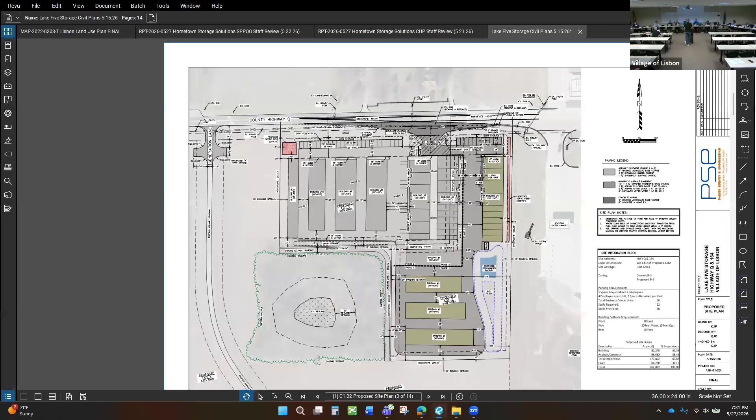Okay, how tall are those plantings? It varies. What's the tallest thing that you've got out there? Probably some of the arborvitaes. Which would be how tall? I believe it's stated in the packet, I don't have the dimensions in front of me.

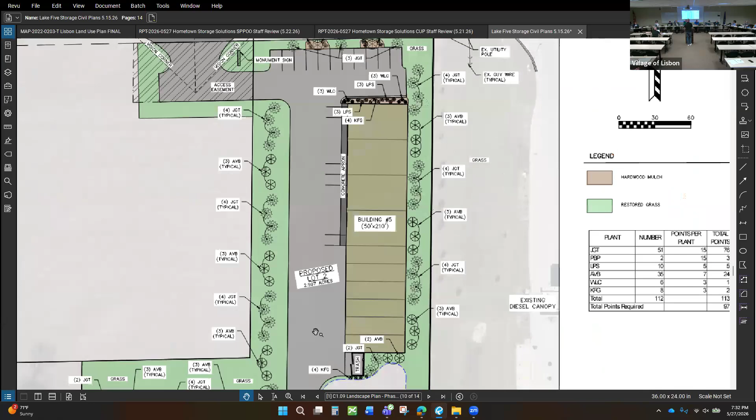That's along the east side? It's throughout the property. No, I'm talking about the screening for the development, primarily the east side, which is the common property line with Quick Trip. I'm concerned about the screening there. There's obviously no berm there, and you've got some landscaping. I know you submitted a landscaping plan.

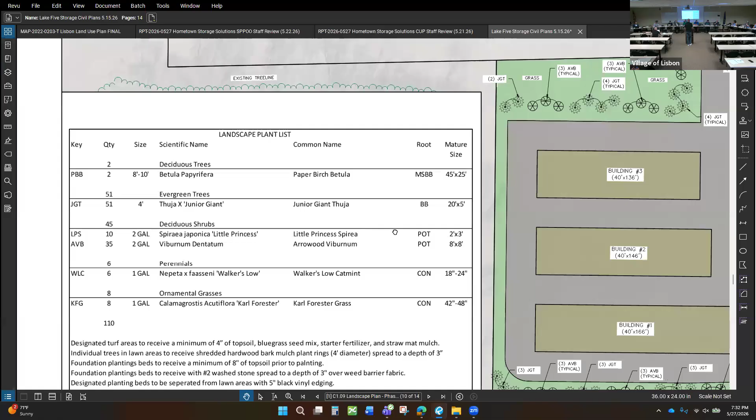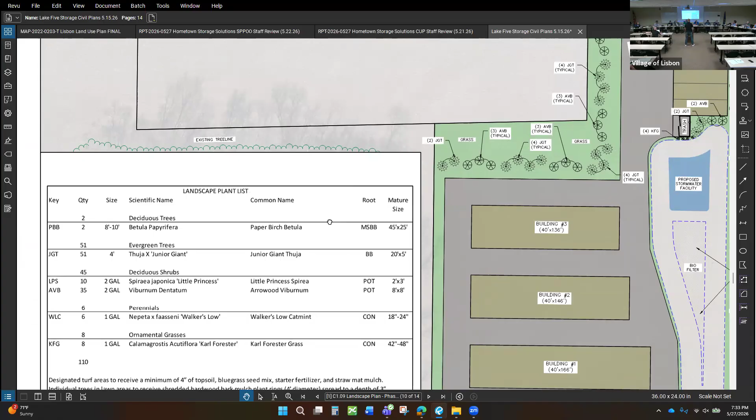I'm also concerned along the same thought. All those buildings, that whole building is identical to the three buildings that are 90 degrees to the south of there. I would like to see those buildings not be identical next to each other, whether it's by color or something, so it doesn't look like the same thing, four buildings in a row.

So we have some type of aesthetics there, because that's what the public is going to see. They're not gonna see the west side or north side of these buildings. I'd like to see something changed architecturally on the ends of those buildings. It wouldn't take a whole lot, but just so they don't look identical. Will there be enough room to do landscaping between the septic bed and the buildings? Well, we're gonna get into the septic later, but that's a concern. We've only got 20 feet between the building itself and the property line on the east side.

So if you figure a landscaping bed of 4 to 6 feet, plus another 6 feet to the septic field, that is theoretical at this point. There is no septic plan for that. Then you've got 6 feet on the other side, and 5 feet that has to be off the property line. The math doesn't work. So, to start, on building 5 there, I believe there's 10 feet between the back of the building and the septic field, theoretical space dedicated to whatever the septic installer needs.

The septic installer needs, I believe, 660 square feet, in which the 6 foot width shown is the absolute max allowed for a distribution cell. The standard width they install is 2 to 3 feet. So when we put together this plan, it was to provide the maximum width they would need for a distribution cell. They like a long, narrow run for the septic install, so we provided as much length as they could possibly want.

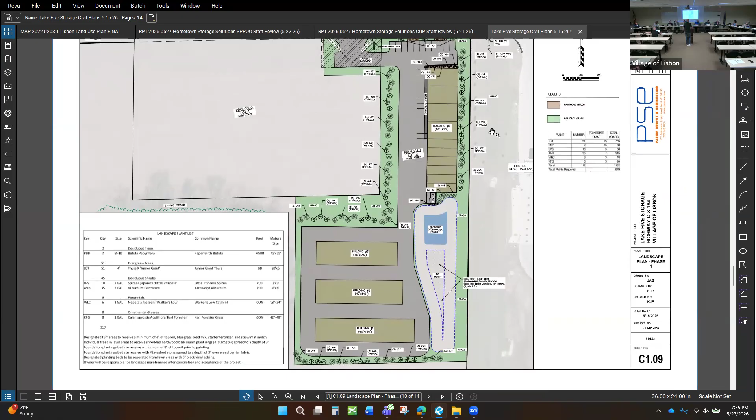Out of the length we have provided, they only need right now 40% of the proposed space, so we can definitely narrow the actual install to well within that 6 feet, and extend that distribution cell further. Well, we'll get into the septic questions I've got later, but let me go through the rest of this, because right now I'd like something to occur on the ends of those buildings.

And the side of the first building, the long building, I forget which number that is. Number 5, and the other 3 buildings that are perpendicular, so they don't look identical. Otherwise, I don't think it's gonna look very attractive at all from the east. Would it be possible to pull up the 3D rendering? We're talking about 4 buildings, one that runs north-south, and then 3 that run east-west.

I'm gonna come back, Warren. What are you thinking? Yeah, why don't you come back?

I'm just looking through the minutes from the last meeting. The next question I have is regarding item E. Can you explain, with no fencing and no gate, how the security on this works? I know you mentioned some type of system that's gonna notify somebody if there's an issue, but how does the Knox box work with no fencing and no gate?

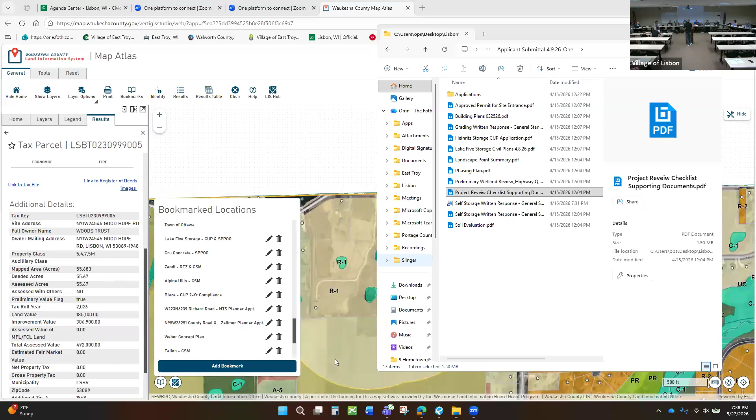As in the planner's report, it refers to the fact that these units will only be used for personal storage purposes. I just want to clarify and have it on the record. There's going to be nothing stored in any of the units, whether the individual storage units or the contractors, other than personal storage items. No, I mean, like a church can rent a unit and put something...

I'm going by what the ordinance says. The zoning code says the units shall be for personal storage purposes only.

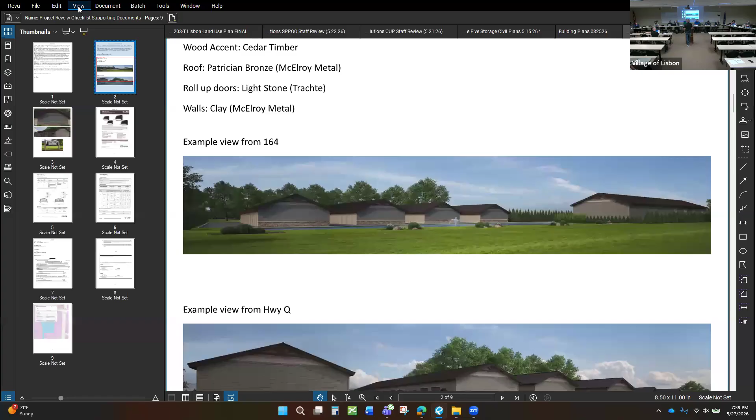The point of having the contractor building is to support space for small businesses. So those units in the larger building are bigger units, they have utilities. We're talking about two different items, right? No, he's referring to all the buildings on the property. Orin is quoting what the zoning code says: the units shall be for personal storage purposes only.

So Barney, want to jump in? Yeah, so the difference between the two uses: the self-storage, the bulk of the buildings and the development, are for self-storage. Building 5 in this phase is the only one that has any proposed contractor storage. The other term we've used previously in other iterations of this project was the 'contractor condos.' We're basing that off of something added to the zoning code when we did the Mudjackers project.

We went through and created a new land use, KK, I think it was the new number, a permitted use under the B2 general business district, item KK under permitted uses. The idea was to allow similar contractor uses, contractor type uses that don't have the outdoor storage component associated with them, where the business is primarily going to be an office and storing things indoors.

That particular land use being allowed in the B2 means it's also allowed in the B3. So it's the self-storage component that's requiring the conditional use. If Mr. Heinritz just wanted to propose this contractor use and have that in all of the buildings, we'd just be talking about a site plan and not necessarily getting into the CU considerations. So the site can have both—the CU is for the self-storage aspect of the use.

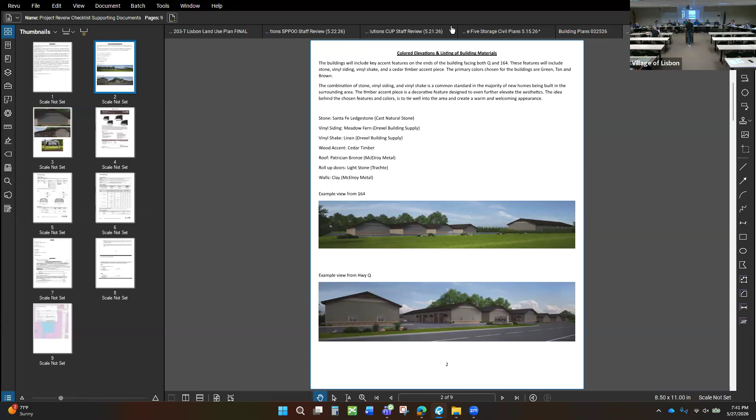When we get into both the site plan of operation staff review, I'm describing the use as being limited to contractor storage and self-storage, so both. And I go on to elaborate what the limit to the contractor storage would be.

So the contractor storage may include general business, trades, and personal workspace, including indoor storage and workshops, limited to no more than 4 employees on site, and that's at the request of the petitioner. On-site retail service businesses which require customer drop-off and pickup, commercial fabrication and manufacturing, overnight outdoor parking, overnight sleeping in units, and outdoor storage are prohibited.

So again, we're trying to put a limit on what can be done in the contractor units. And again, in this phase, it's just building 5, which is the furthest north, the long building, and it is 4 units. So the first 4 units within that space are being proposed to have that use.

The rest of the building would be self-storage, correct? Okay, I thought I read it differently, but whatever. Let me see what else I had in through here.

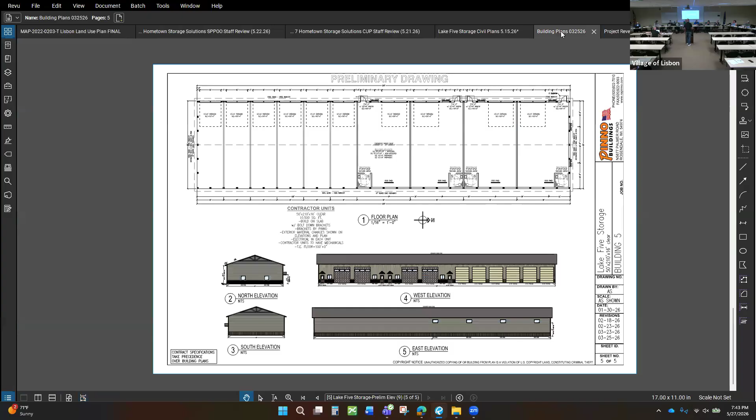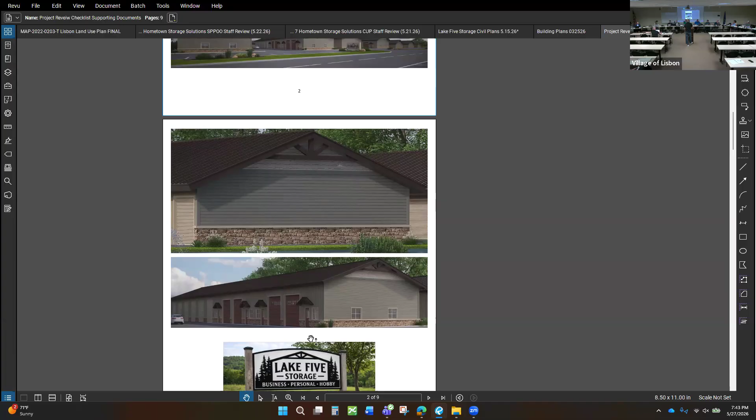So what I'm getting at, and why I believe we should postpone this until we get the design done, is that the septic system info in the latest packet is all speculation as far as the design. As an example, you've got in there 6 feet wide by 258 feet or something like that. At a quarter inch per foot, that pipe's going to be down 8 feet, and you're only 5 feet away from the lot line. The math doesn't work out.

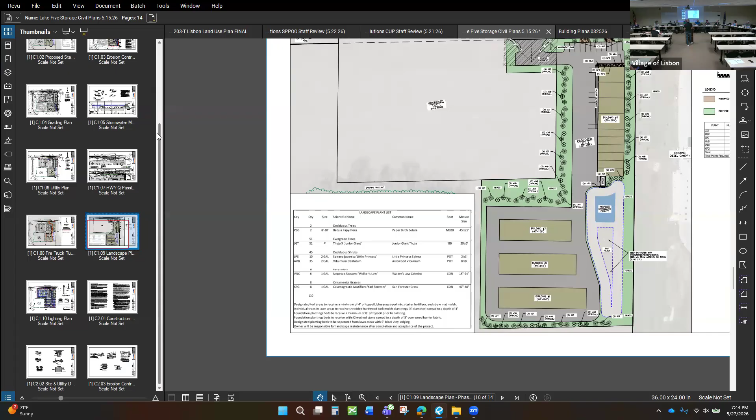In order to review the septic system, we have to have an approved design. And I think we've got the cart way ahead of the horse, because based upon the soil borings, which haven't been done yet for the septic system, which determine the size, width, length, and depth of the system, how can we approve a site plan when we don't know if it'll work?

And I feel that's where we went and greatly exceeded the space that's needed based on the samplings that we have done. For the stormwater pond, which is at the other end of the property, it's not where the borings have to be done for the septic system.

Lauren, you did some research here and you have it in the packet. Do you want to, Attorney Larson, jump in as well? Otherwise, we'll go ahead and address that.

First, I just want to stay focused on the conditional use. We're in a public hearing on the conditional use, we shouldn't be knee deep in the site plan necessarily. We're talking about the use. I understand they're related, but we should stay focused on the issues for the public hearing.

But my concern is the layout, which is the site plan, which deals with the use. How can we review and approve the use if we don't know if the layout will be able to be done? We're way ahead of where we can be. The site plan is done based upon the use and also what else has to go on the site, so it does have to do with the use.

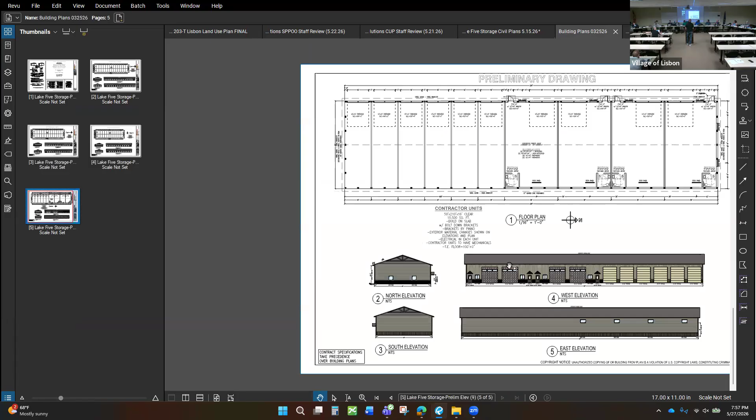So here's the renderings that show what the doors on the contractor units would look like, and what the end caps of the buildings would look like. And then we've actually got architectural plans as well, so this portion of the building would change to look like the south end of it.

If there couldn't be contractor condos, if you can't have the bathrooms, you can't have employees, it could be a larger storage unit, but it couldn't function the way that it would be intended, because the bathrooms allow there to be the employees, the people there. So my question is, is that more of a building inspection use-of-the-space issue than it is a zoning issue at that point?

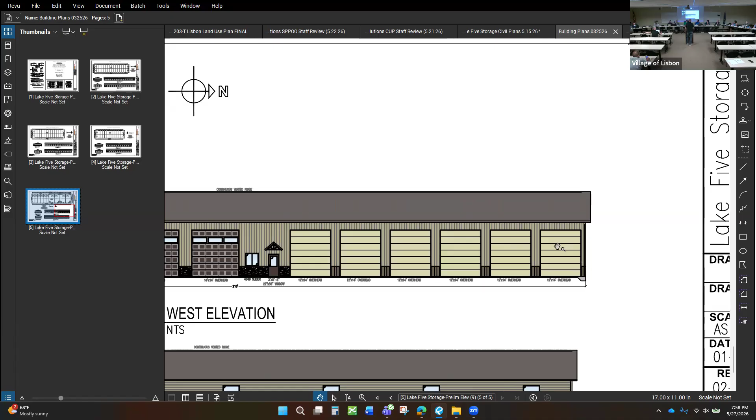That's what we're talking about potentially being different. So if you can't support people in there, then you can't support that aspect of the use. That aspect of the use was part of the site plan of operation, not necessarily the conditional use for the self-storage.

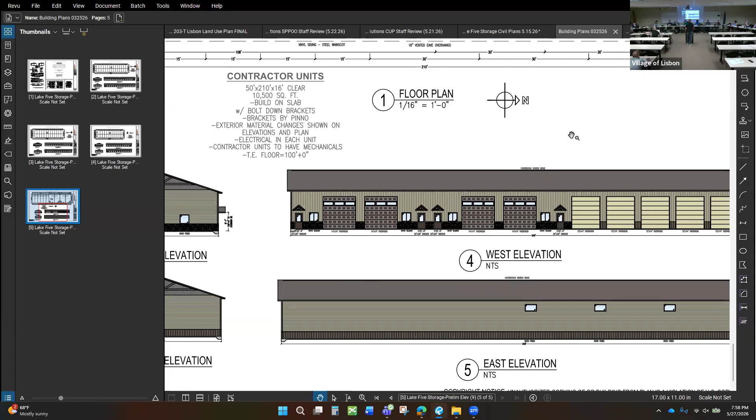We aren't naming... well, I guess this is maybe a question for Eric. The number of units changing, is that going to trigger a change? It's a conditional use. I don't think it's gonna change the conditional use, but it might change the site plan. So again, it comes back to the site plan of operation. The building elevation would change and the plan of operation would change based on a potential change in that portion of this building.

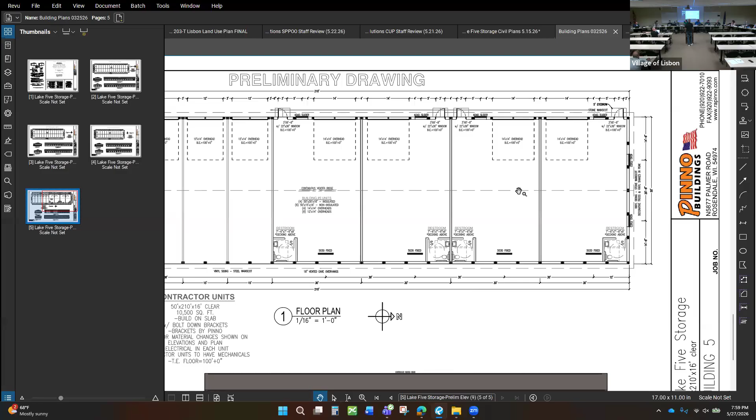So if I'm hearing staff correctly and everyone else, there's a comfort with potentially closing the public hearing, although Joe would like to adjourn, but we need to get a consensus here. We're not ending debates, we can still have debate during the plan commission meeting. You don't usually vote on closing public hearings. It's whenever we're done with hearing comments.

Well, under the circumstances, I think we probably should. I mean, Eric, previously when there have been questionable conditional uses, we have gone through the responses to each of the standards that are required in the zoning code. We're not to that point yet. We're just trying to decide whether to close the public hearing or adjourn the public hearing. And if Commissioner Eberly wants to make a motion to adjourn the public hearing, we can see whether it's seconded and adopted.

Before that, there's still no one on Zoom who wants to make a comment on this item. Because this is a public hearing, if anyone on Zoom would like to speak, please use the raise hand function.

Joe, do you want to make that motion to adjourn? Well, I don't think I'm to the point yet. To me, here's what the problem is. We're having a public hearing in front of the public, and I'm trying to be adversarial here. But we're having a public hearing on a chicken, and the chicken may turn into a duck after the public hearing. The public hasn't had a response to the duck because we had the public hearing on the chicken. That's what I have a problem with going forward with this, because we'd have to start all over again, have another public hearing, because what is coming before the plan commission and the public is not what was presented at the public hearing.

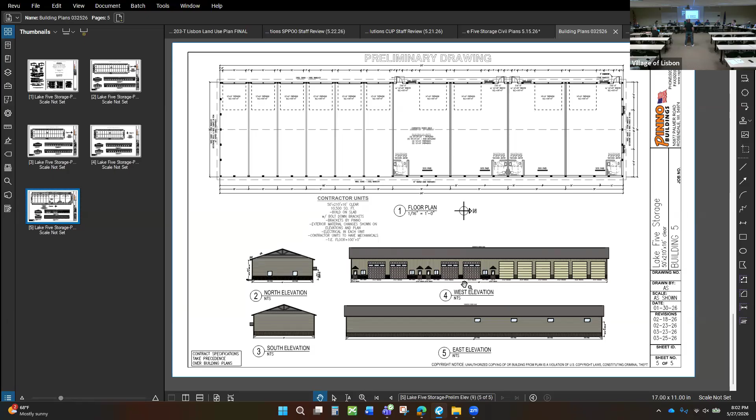Commissioner Eberly, would you rather make a motion to table the public hearing? I would rather do that, for the protection of the village and for the protection of the petitioner. I would make a motion to postpone or delay the public hearing until we receive that information and it's been reviewed by the county and approved - that we have an approved septic system and a drawing that shows where it's going to go and how it fits in with the setback between your east property line and that building.

All right, so again, let's make sure we're on the same page with terminology. Adjourned is what you had it from last time, which is the same as tabled. I'm asking, since Mr. Eberly will not have the answers to his questions tonight, did he mean to want to table the public hearing to the next meeting or to a specific date? Not adjourn, because adjourn would mean that the public hearing was over, and it sounds like Mr. Eberly doesn't want to do that. I don't want to split hairs, I think the way he said it was fine.

He wants to postpone it until we have the decision of Waukesha County concerning the septic. So there's a motion. Is there a second to that motion? Second. All right, so this is a non-debatable item, so there's no discussion.

All those in favor say aye. Aye. I heard three ayes. All those opposed say nay. Nay. Sean raised a hand. I didn't hear anything from Brian or Rob. Which were you, ayes or nays? I was thinking too, but I'll be... not. Let's call the roll. President Gerke, the motion is to table, and I'm a nay.

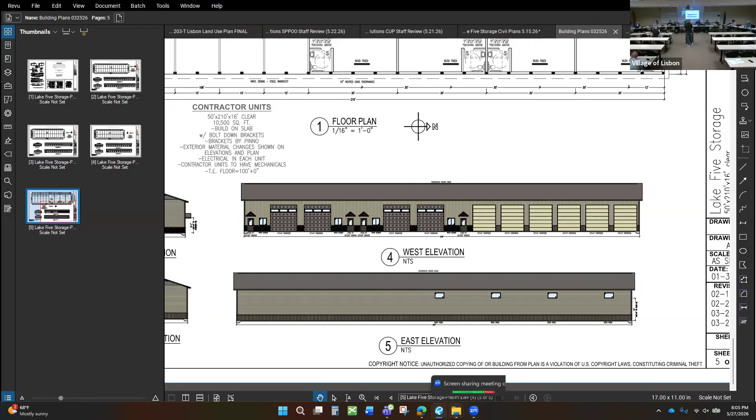We're on to item 3, which is citizen comments. Are there any citizens on Zoom that wish to speak on any of the items on tonight's agenda or otherwise? If anyone on Zoom would like to speak during citizen comment, please use the raise hand function. This is your only chance to speak for the remainder of the meeting. No hands raised on Zoom.

Item 4 is approval of the minutes from April. We're just waiting on getting those finalized, there's a correction that needed to be made. I was hoping to finish it up, but I still had a couple of paragraphs to finish before I had to leave today, so I'm asking to skip that until next month, and then I will have those as well as tonight's minutes. No motion needed. Second. Item 5A is unfinished business.

James Heinrichs, you can... are we fine with that? I think so, all right, everyone's fine with that, we'll take this out of order. You're aye, Matthew, right? So Robert, item six, you're pointing to the wrong one. I'm sorry, Robert, I thought you were the cell phone six guy. B and C is on Zoom. All right, so Robert, come on up.

Item 6A: discussion and necessary action regarding Robert Miller at Gospel Fellowship for approval of the site plan and plan of operation amendment on the property located at N74 W25332 Howard Lane, Lisbon, tax parcel number 0208.989.

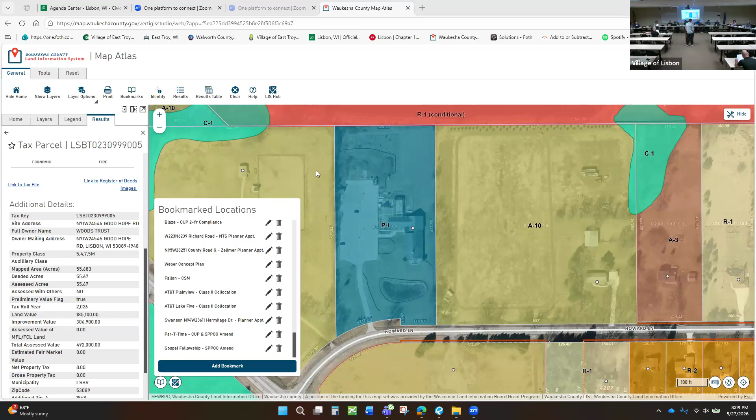Yeah, so the septic system is farther to the east, and the proposed garage is going to be right next to the parking lot, behind the electric box, set back from the church itself, closer to the swing set area. It didn't look like there was a lot of room there. Well, the building's only 20 feet deep, so it's a small garage/shed, it's going to come 20 feet off the parking lot and run north and south along the parking lot. Okay, so it'll pretty much go up to the playground area then?

Yes, the electric line coming back is going to come between the proposed garage and the playground area, so we're aware of where that's at, so that's not going to be impacted at all. We've looked at the site plan, and there should be plenty of room to put this 20 by 44-foot structure.

The electric box won't be underneath the pavilion? Not at all, no, outside of it. It's way closer towards the building, so we're farther north from the electric box.

Any other questions or discussion? No, I just, like I said, I don't see how it's going to fit in there with all that stuff in the way, but. Orin, do you have any concerns on that? I mean, Sherry knows this area obviously very well.

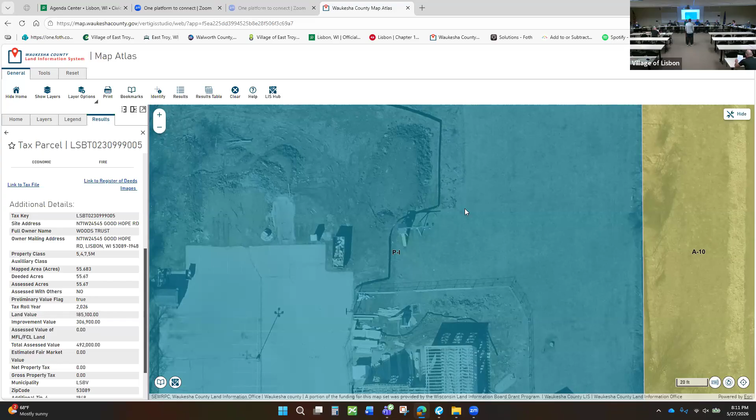All right, is there any other discussion? Well, my only other concern, which I think Orin addressed, is that it not be used for public venue use, which I think is one of his conditions. Yep.

Jerry, do you want to make a motion, or do you want someone else to? Is anyone ready to make a motion on this item? I'll make a motion to approve the site plan and plan of operation amendment request for Robert Miller, Gospel Fellowship of Sussex, Inc., for the property located N74 W25332 Howard Lane in Sussex, subject to planner's comments. I'll second. Is there any additional discussion?

Hearing none, all those in favor say aye. Aye. Aye. Opposed, say nay. Motion unanimously carries. Thank you for witnessing our meetings tonight.

You said the petitioner for 6B and 6C is present and on Zoom, so we'll take B first, obviously. This is the AT&T Wireless application for approval of the site plan and plan of operation amendment for a Class 2 co-location on the existing communication tower located on the Summit Horses and Hay property at N80 W26020 Plainview Road, Lisbon, tax number 0176.996.

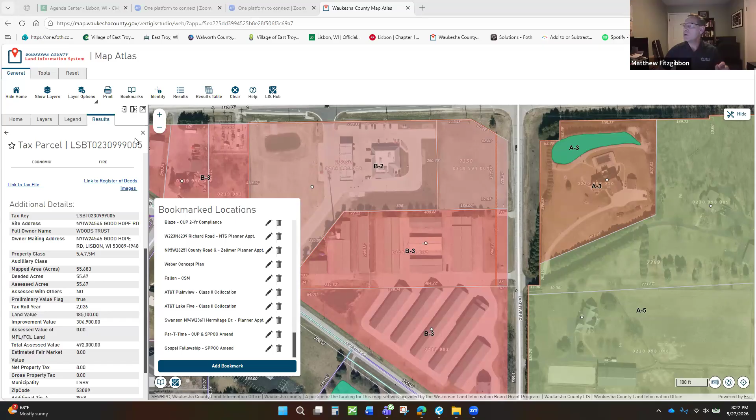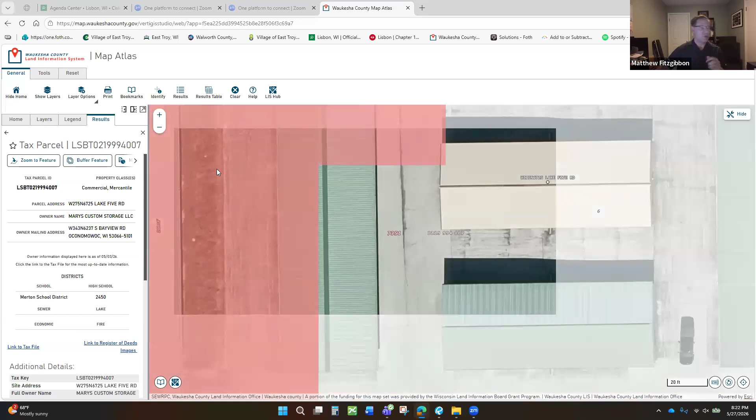That's correct. Pardon me, I'm opening up my folder and making sure it's a stamped structural analysis with a current engineer stamp. Yes, we have the structural analysis, and I'll be submitting that to the village in the next few days as part of the building permit application. Great, that was the only question that I had for the petitioner.

Obviously Kurt's comments from the last item apply here. Is there any additional discussion, or are we ready for a motion? Ryan, you want to go again?

Sure, why not? I move to approve, on behalf of AT&T Wireless, a site plan and plan of operation amendment for Class 2 co-location on the existing communication towers located at Mary's Custom Storage at W275 N6725 Lake Five Road, tax key 0219.994.007, along with planner's comments.

Second. Is there any additional discussion? Hearing none, all those in favor say aye. Aye. Opposed say nay. Motion carries 6-1.

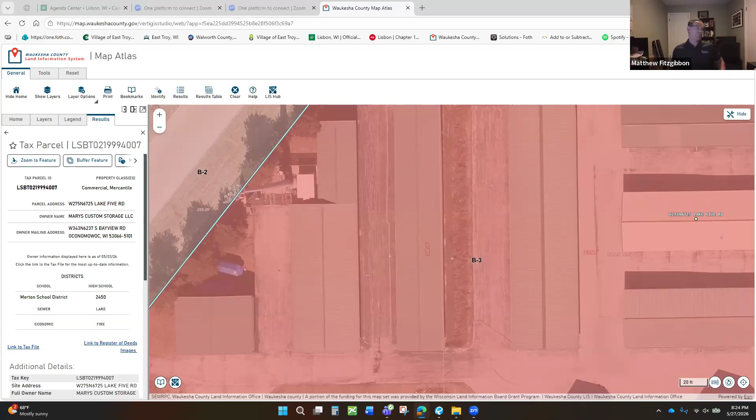Thank the planning commission and the Village of Lisbon staff for your time and appreciate the recommendation. I'll be following up with building permit application. Thank you, Matt. Have a good night. You too. Bye-bye. All right, so James, we're back to you. Thank you for being courteous to the last couple people.

So item 5A is James Heinrichs and Hometown Storage for the conditional use permit to allow a self-storage facility on a parcel. This is an unofficial parcel number apparently, but it is lot 2 of CSM 12806. Current tax key is still the same as shown under the public hearing, in the B3 general business zoning district.

So we've had a lot of discussion here. Where are we, is the recommendation here to go through these line by line? Is that where we left it? Well, my suggestion is, there were a few of these standards called out and questioned, and so my suggestion would be to focus on those. Unless somebody says otherwise, the ones that weren't called out would be found to be satisfactorily approved. Are we doing the CUP first or the site plan?

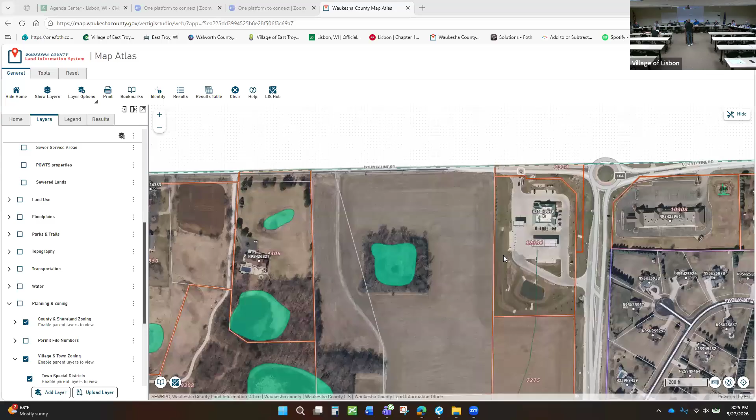We're doing the conditional. So for example, section A, it needs to be on an arterial street. I don't think that was in question. B, you addressed the fire trucks issue. I don't think that's in question. Landscaping, do we still need to, Joe, you want to circle back to that one? No, I was more concerned about the architectural treatment of the buildings. Okay, so C and D, we're fine with. Security measures, we're fine there, I believe. Stop me if I'm skipping over something we want to keep talking about.

Exterior lighting, we discussed that, which is F. G is state approved plans. I think we have that. So H, architectural plans with elevation rendering. This is one where at least one commission member asked to break things up a little bit on those 3 parallel buildings with some color changes or something along those lines. What are your thoughts there, James?

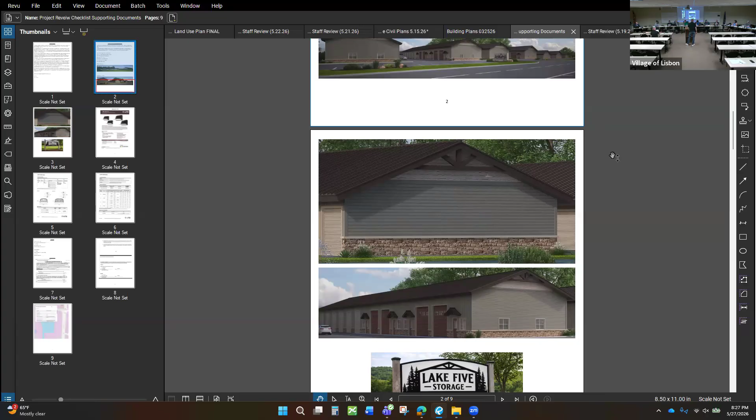So there's been an extensive amount of design elements that have gone into the renderings that are shown currently. I know there's some bias here, but we tried to go a step above existing facilities in the area, trying to make this as nice as possible. These are the core elements of any residential home that gets developed in a subdivision. You have stone at the bottom, you have vinyl siding. It's very common to have the decorative vinyl shake, and then the cedar accent piece in the peak, trying to put it above and beyond anything in the greater surrounding area. That would be the end facing 164 on those three, yep.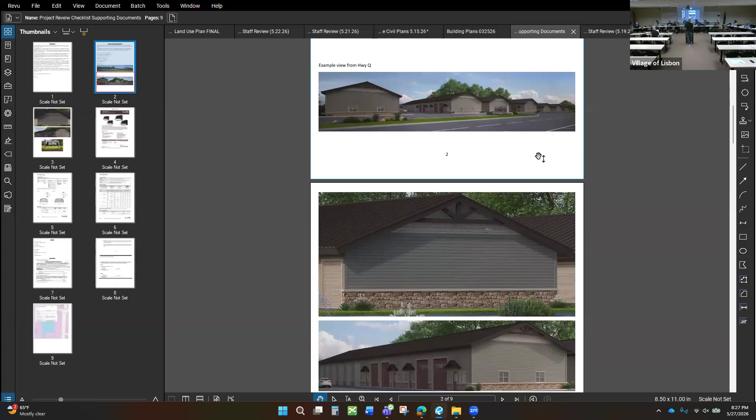And so if I heard you right, Joe, you want building 2 to be differentiated from buildings 1 and 3 on the east side? Have them be identical? Right. Identical as in different paint, or identical as in different windows and a whole different layout, what are you talking about? So that somebody viewing them going down 164 doesn't see 3 identical buildings right next to each other. Whether it's color or architectural features, it doesn't matter to me. They shouldn't be the same.

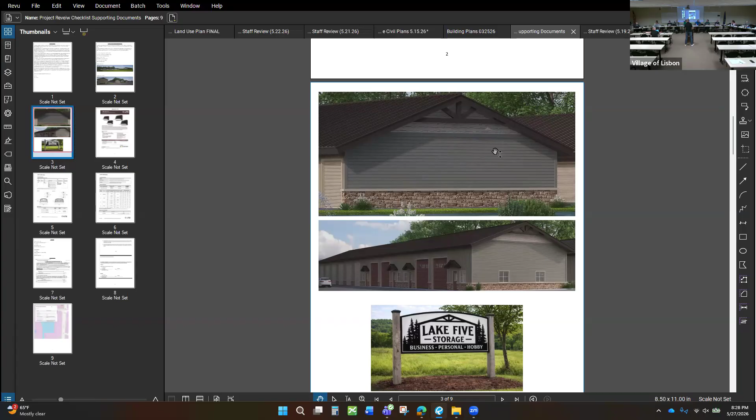Otherwise, we're going to end up with the same thing. If phase 2 goes ahead, we're going to have a whole lot more on the other side be identical. It's going to look like identical buildings. I mean, what have we got, 1, 2, 3, 4, 5, 6, 7 buildings facing Q with phase 2. Here we're at 3 and there's a property removed. I don't have much of an issue, but Joe, let's take a poll. We need to do a formal vote like we did last time. Eventually we're going to need a vote, but for purposes of discussion, let's go down the line. Where do we think that to meet this criteria, there needs to be some change in the design? 1 yes, 1 no. Kurtz, why don't you go ahead and start on your end?

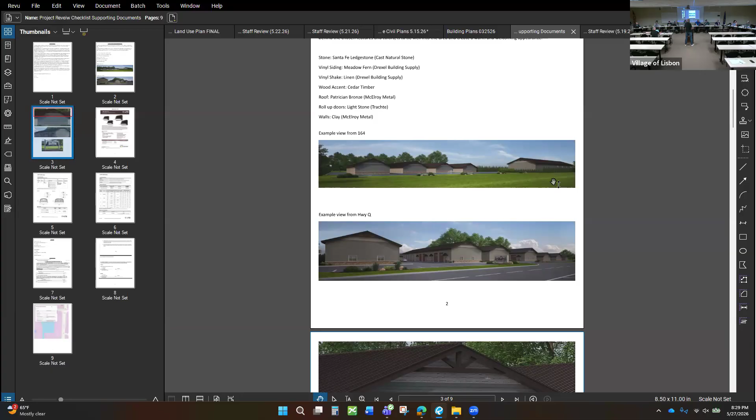So we asked them to do some architectural design on these buildings to make it not look like a standard self-storage unit. I think he's come back with some really good options. I understand that they all look the same, but they don't look like necessarily a self-storage area. So from my perspective, I'm okay with what they have.

All right, Sherry? I appreciate the addition of the stone or brick on the bottom and the insets in the peaks to make it look not like just a metal building. So I would be okay with that.

Brian? I'm okay with the structures themselves. A little color would be nice, but I don't think all 7 buildings have to be different colors. Maybe half of them, or break it up, but I'm not even that particular on that. I like it kind of designed. I don't think more colors is needed, that might make it look worse and stick out if you have 10 different colors.

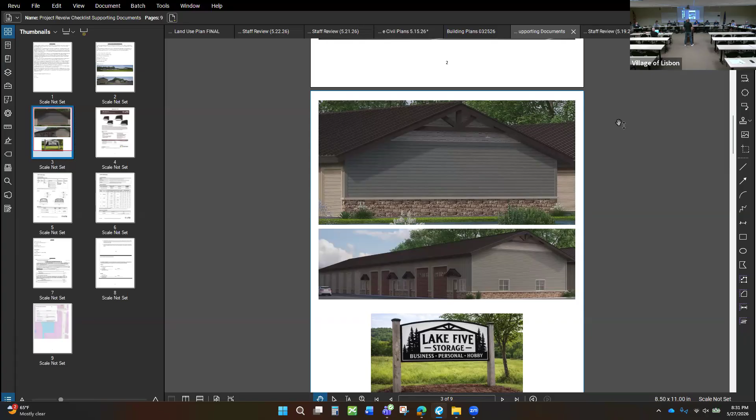All right, so are we done with H then? I is no overhead doors should face the right of way, and I don't think we have that issue here. J, parking issues to allow, including for snow plow areas, no issues there. K, outside storage, no plans for outside storage, so we're on to L.

No, we talked about this one, right? No commercial businesses in there. All right, so then we're on to the next set. These all have, so yeah, these apply to all right.

Stop me if I'm making a conclusion people don't agree with. C, the proposed conditional use shall be compatible with the character of the neighborhood in which it's located. There's a number of factors to consider, landscaping, screening.

We find there? I would say my only comment on landscaping and screening is that there's enough room along the east side where their septic has to go to allow landscaping.

How far off the line do trees have to be, or arborvitae bushes? Can that be done so they won't interfere with the septic beds? There's no setback for landscaping. The issue would be you don't want roots getting into the septic area. Right, that's what the concern was. There's not a lot of room to play with, unfortunately.

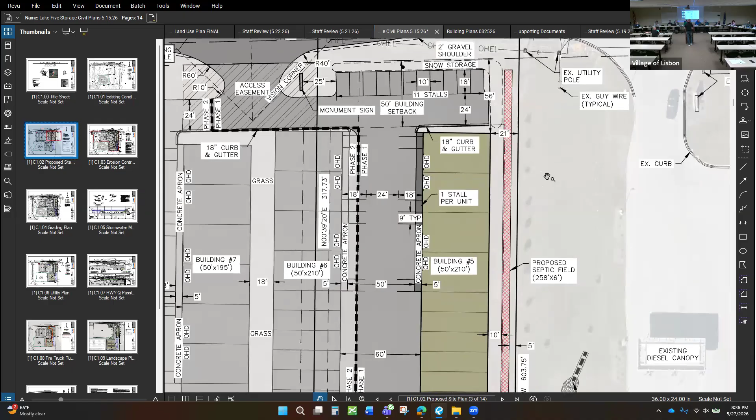Would staff have the latitude to approve an amended plan should there be an issue with those plantings being proposed being where they're proposed? Because of the septic—looking at it, it looks like QuikTrip does obstruct the backside of the long building that goes north-south, and that's kind of where that leach bed is planned for the septic. But maybe where the other three buildings are going east-west...

Maybe having more taller trees or something to obstruct those buildings, because it looks like you'll be able to see those more from 164, since QuikTrip doesn't extend that far south.

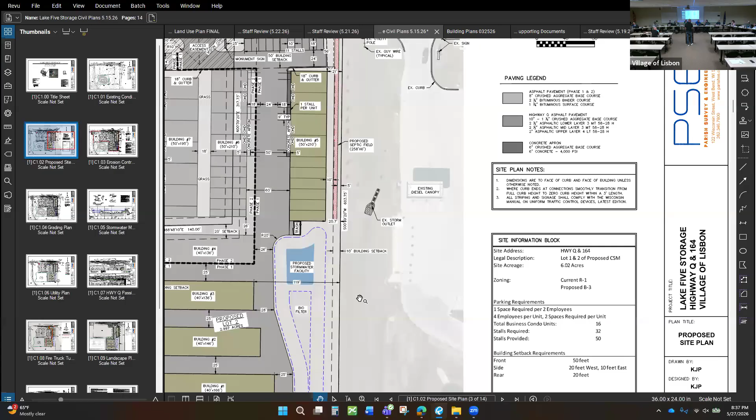So Kurt, you're talking about the southernmost three buildings? Yeah, just clarifying—in that area, because there's not going to be a septic system down there, just make sure that you have trees landscaped in that area to obstruct that view. It'll kind of break those buildings up as well, per Joe's recommendation.

So if we give Orin the latitude to approve the landscaping plan—you've received feedback about the grasses for the building and the trees for the southern three buildings—do you understand what the commission is looking for?

Yeah, I think we can probably shift some stuff down that is in that 20-foot area that might be too tight there, and potentially have something there once we know how the septic system will work. But yeah, if some of that other stuff shifts down to the east side of the stormwater pond, I think that's what you're talking about, Kurt.

All right, item D is ingress/egress to minimize traffic hazards and congestion on public roads—any concern there? We'll move on to E then, adequate off-street parking.

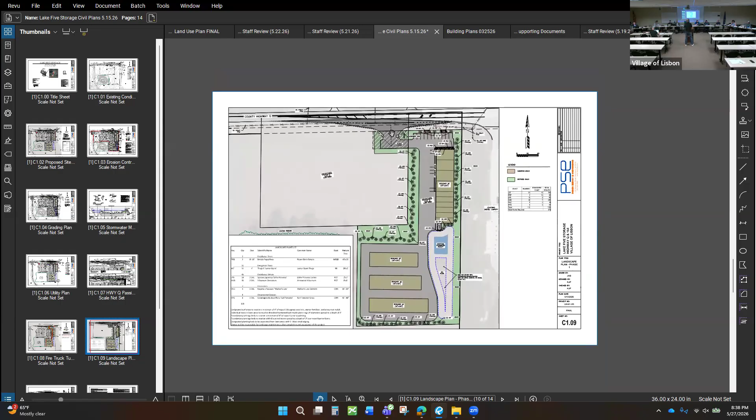We talked about that. The proposed use should not be noxious or offensive due to vibration, noise, odor, dust, smoke, or gas. G, the proposed use shall not—already, okay, I think we talked about that. We're fine with QuikTrip being there and other properties being vacant, no concerns, right?

H. How was this different than G? All right.

I, the public interest and welfare supporting the proposed use shall outweigh the individual interests of the proposed use. Okay, moving on. All other conditional use standards identified in section 18.04 H or elsewhere shall be met—kind of a catch-all, huh? It's a catch-all. Yeah, I don't think we need to go there unless there are concerns.

All right, so if there was a motion to approve, there's a lot of items listed here as conditions. Is landscaping one of them that needs to be amended or added? We would need to add one, and that would actually be on the site plan of operation. Okay, all right.

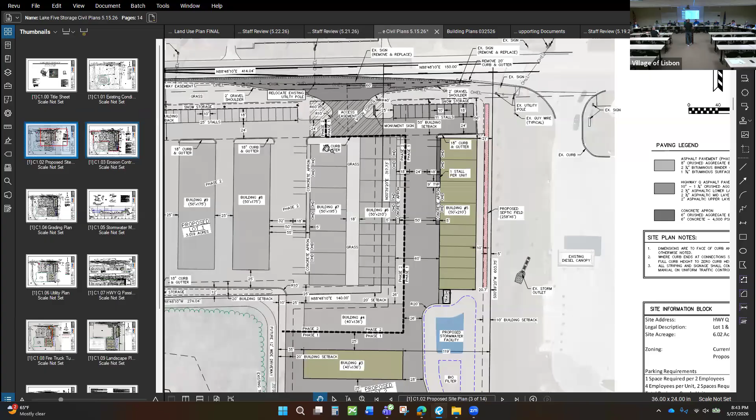Just that we, based on the discussion, would want to add a condition that this be subject to the petitioner submitting a revised landscape plan to the village planner for review and approval based on the comments from the plan commission.

Don't have any comments before we can take a motion and then still have discussion? I would point out that when the contractor condos are opened, any of those tenants would still be responsible for coming to Plan Commission and getting their own site plan of operation approval for their business. So we still get a kick at any of those contractors.

Motion to recommend to approve the Hometown Storage for a site plan of operation proposed on a storage facility on parcel LSBT 0161.999.010 in the B3 General Business Zoning District.

Rob, can we make that an approval rather than a recommendation for approval? And can we add that it is now known as Lot 2 of CSM number 12806?

Thank you. Is there a second? I'll second. Who was the second? Brian? Yeah.

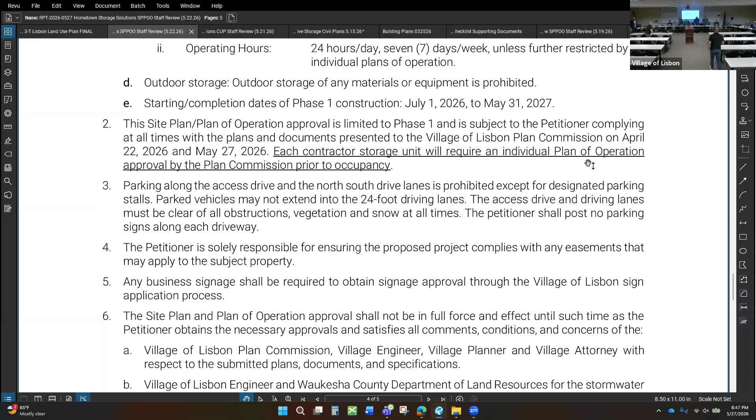I was only off by 45 minutes. Thank you, everyone, I really appreciate the extra time. You're all nice.